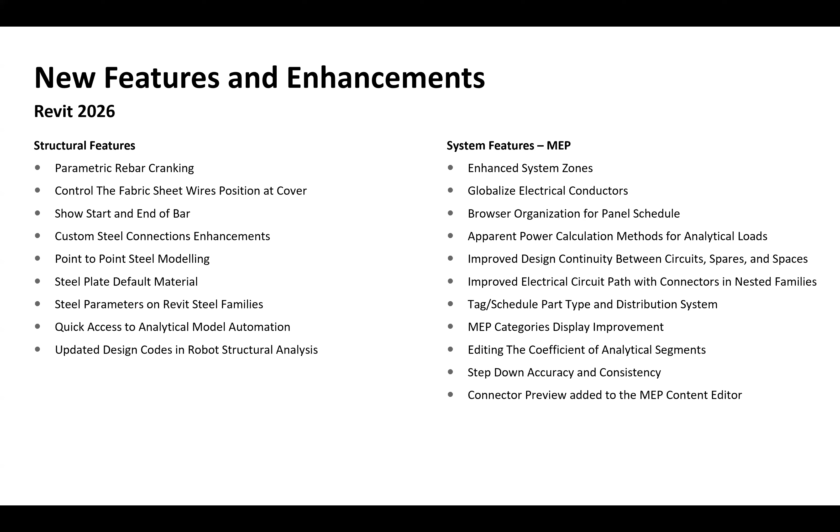Let's talk about the core highlight features from the list we have seen before. The major one is ReCap in Revit 2026. In Revit 2026, you will see the introduction of this ReCap plugin, which introduces powerful scan-to-mesh capabilities. This will enable you to convert point clouds into segmented mesh models using local processing. So the plugin offers local processing.

When you process that model, it can be opened in the ReCap mesh editor, which allows you to select the mesh surfaces within your mesh model. Then you can classify them into sets of groups and layers, and you can clean the mesh before exporting to different software or different formats.

There are plenty of formats supported by the plugin, which includes NWC, which comes from Navisworks. If you are using any other software, you can export to OBJ. In addition, there is another format for Revit specifically, and you can export to that format and then link your mesh with Revit.

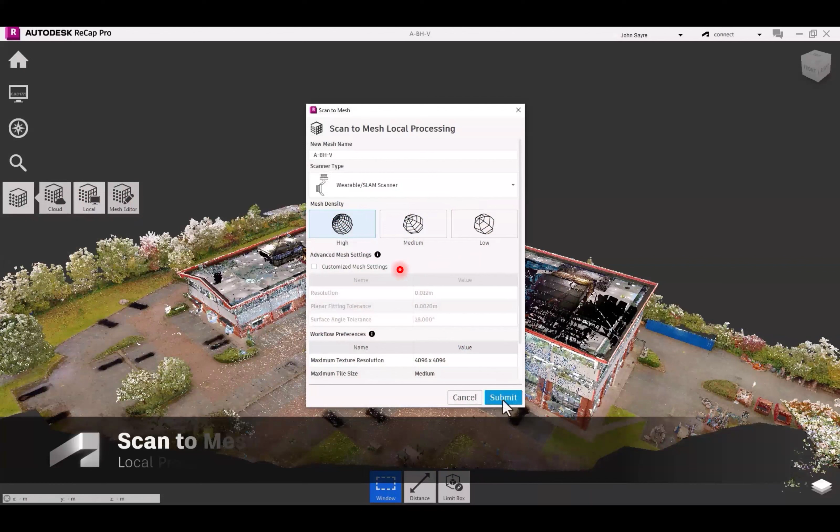So if you are exporting an NWC file, it is automatically clash detectable in ACC. Okay, which is again a very good feature. So I got a little bit of video over here where you will see we got the local processing, and we got some options over here where you can select the mesh density as well.

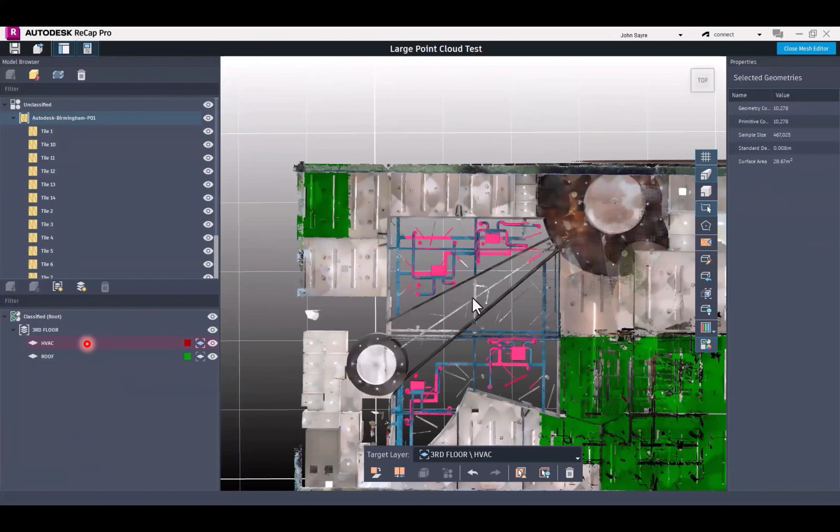And once you select it, you can open the model in the mesh editor. So these are simply the classifications there. You can classify just like it's selecting here, and you can add it to the classifications. And again, it's easier when you export it to Revit. You can easily classify these as the families. So it's better you do all of those things in Recap Pro before exporting it to any other software, be it Navisworks or Revit.

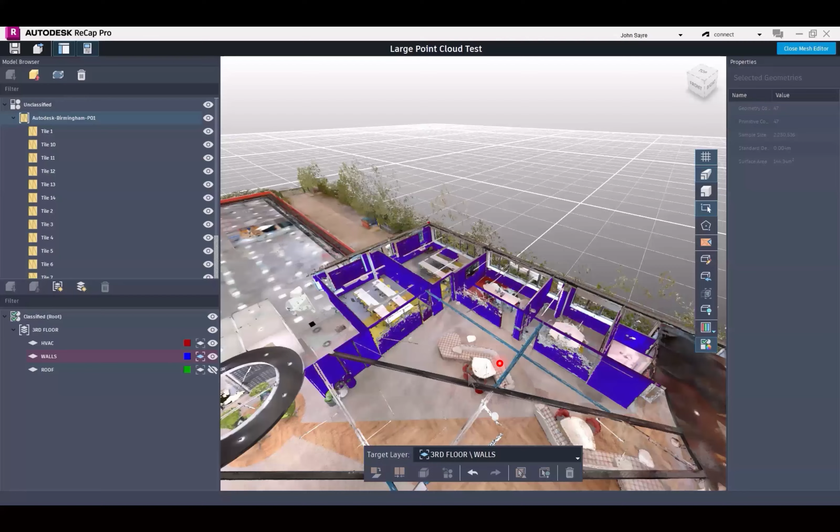So that's the new one, which you will see if you open your Revit now after installing Recap Pro 2026. So you can link Recap mesh models, and you can see it's already linked. Now it's adding to the document like that. And you can select objects, promote to the family, see the family name, use the existing family template or whatever you want to use. Yeah, so that's okay. Let's go next.

Again, so we already discussed, within the Revit Family Editor, after exporting your mesh to Revit, you can fine tune objects simply by adding connectors or connection points and define extrusions for those mesh model lines. And you can do the parameters as well.

So Recap files also work seamlessly with your Autodesk Construction Cloud, like they are automatically flagged as clashable in ACC. So you can run detailed clash analysis between your point cloud and design models. So you don't need to muck around, and you can easily do that clash detection with your point cloud. So meshes created in the process don't yet support the real world texture, but no worries. It's already on the roadmap of Autodesk. So maybe in the near future, you will see those updates as well.

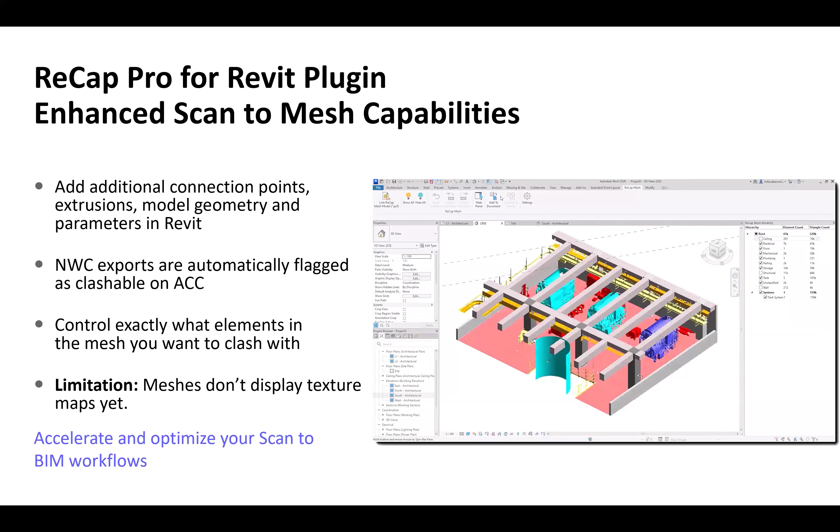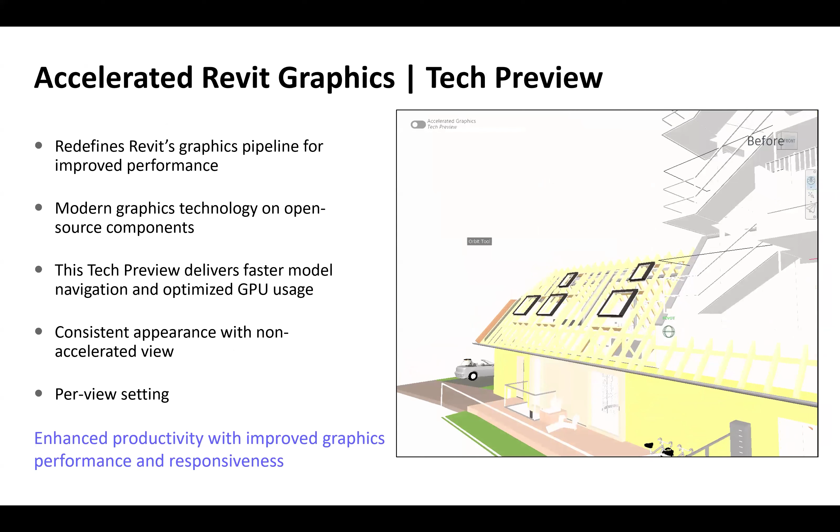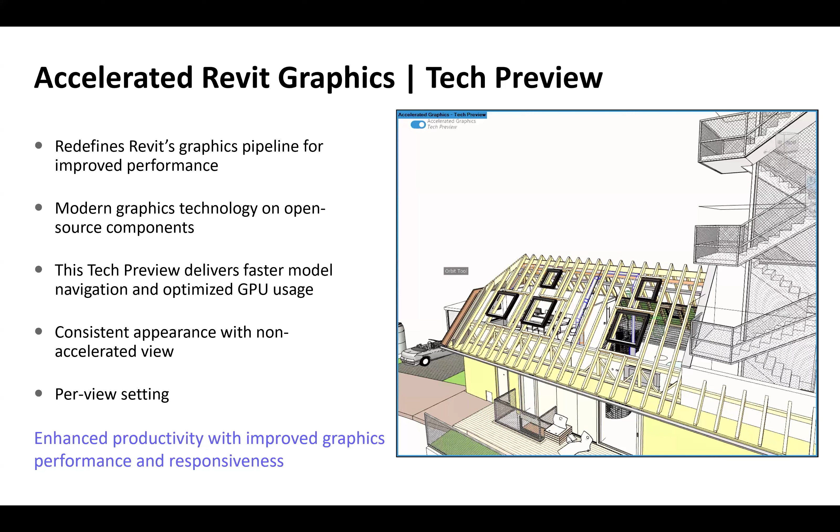Okay. So in Revit 2026, we got the introduction of this accelerated graphics tech preview, simply overhauling the graphics pipeline for improved performance and hardware utilization. So this feature will allow users to simply toggle on the accelerated mode quickly, and you can see some modern graphics, and you can speedily navigate around your model and make your design reviews even faster.

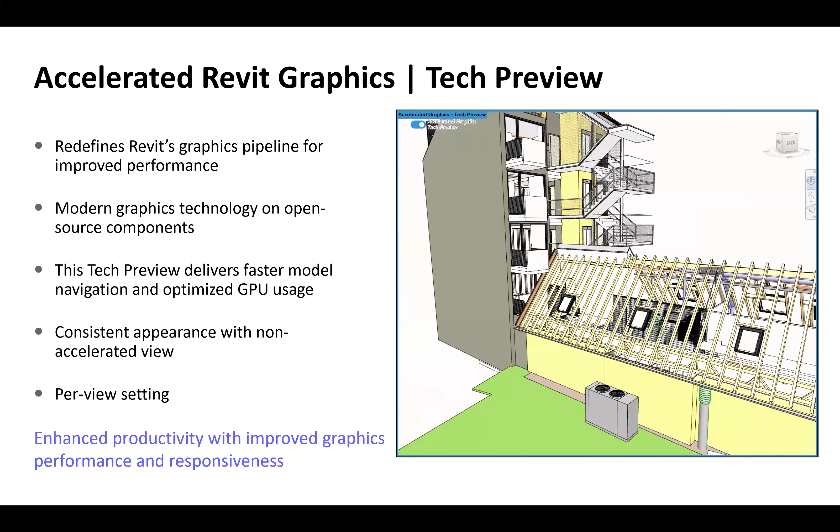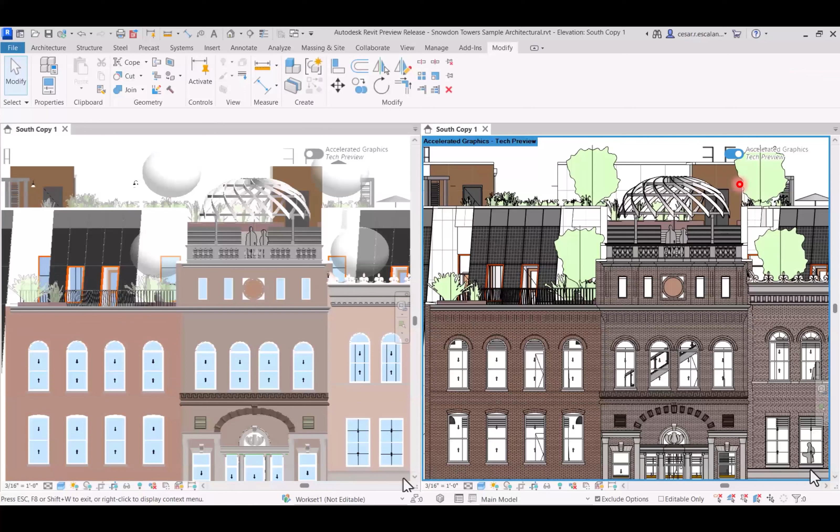So, yep. And again, I got a little bit of video about this, how you can quickly toggle on and all that stuff. You can right click on your screen, you got the option there, and you got this option here, which you can quickly toggle on. And you can see this is without accelerated graphics, and this is with accelerated graphics, which are a lot different from each other. So you can notice the difference in the details with accelerated graphics.

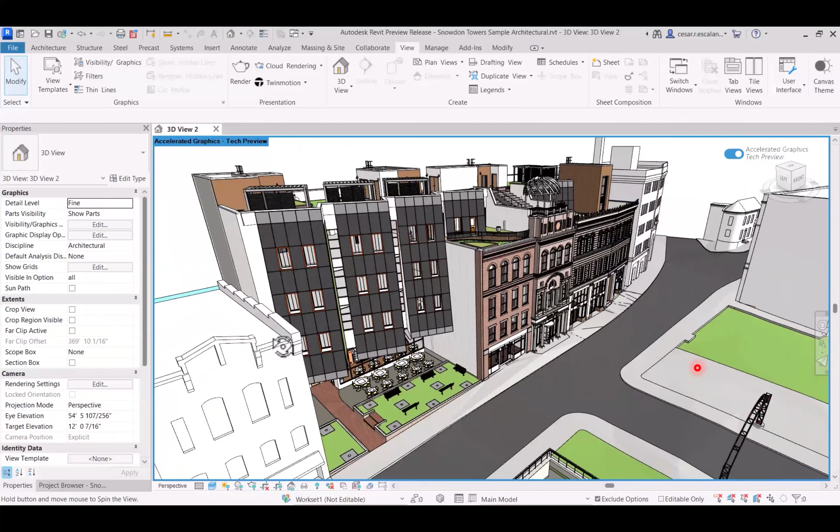Okay, so we have some limitations with accelerated Revit graphics. It supports most geometry, including Revit links, but keep in mind it doesn't support coordination models and point clouds for now. And also the realistic views still show as shaded, and the drafting patterns or your annotation stuff, you will see they are not accelerated, which means the views which are heavily annotated might still lag a little bit. Also, views like your sheets, legends, and drafting views don't fully support this new pipeline.

Also, there are some minimum recommendations as well, and make sure you meet those hardware requirements. You must have at least 4 GB of GPU or minimum 16 GB of RAM. So if memory runs low, Revit overall performance could become slow, and your graphics acceleration won't fix that. So make sure before using that, you at least meet these minimum standards.

Okay, now the coordination model enhancement. So if you use coordination models in Revit, you can now use visibility graphics to override their appearance and colors easily. So you can load multiple models like that and change their colors so that you can quickly determine where they are coming from.

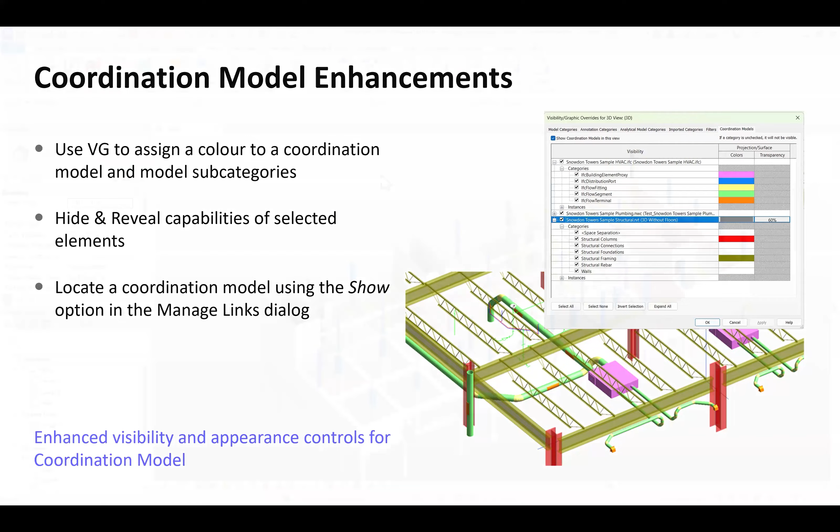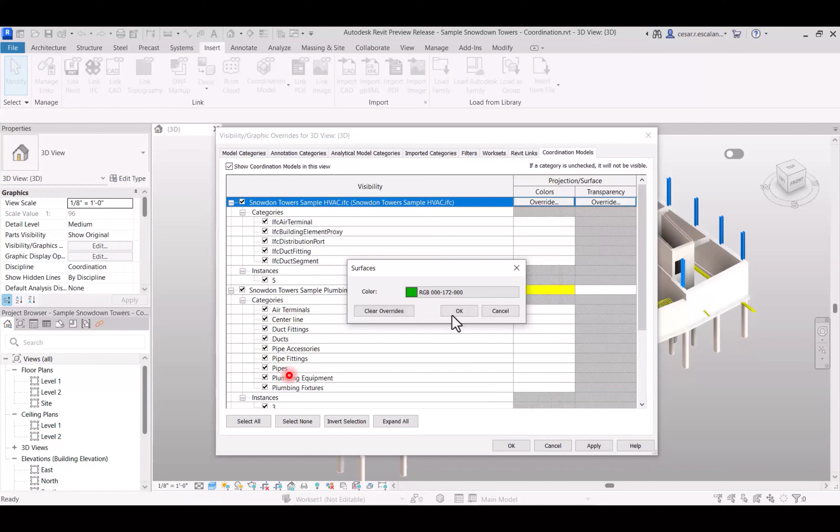Again, we got a little bit of video here. You already have this idea. It's simply adding unique colors to your loaded coordination model. So you can simply define, and you can even access their subcategories as well like that. So it's pretty straightforward for everyone. And you can now hide and use these visibility graphics.

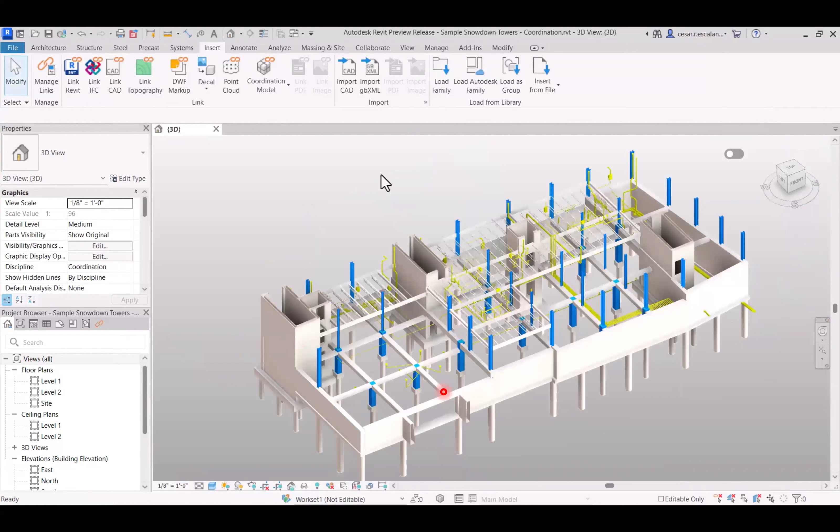Okay. So let's now talk about the features which are for users, for day-to-day users, not specific to any discipline. So you will see in this the sheet positioning and updates on the other stuff as well. So previously we had the guide grid for placing the sheets correctly, or aligning them by using the guide grid.

Now there's an option in Revit where you can just use your existing sheet or refer to an existing sheet and save your existing sheet location or position. And for the rest of the views, you can simply reuse that saved position. So I got a little bit of video here, which is pretty easy. You can see the new ribbon is actually added here. Let me play that.

Okay, so you can see the new ribbon is added here. You are in this view, and you can simply save the position, write down the name, and you can simply select the views. And in views, you got the saved position parameter as an instance parameter. So you can always select which saved position all of your views should follow. And if you change or update your default view, or you change the position, it will affect all the views which have the same position parameter defined for them.

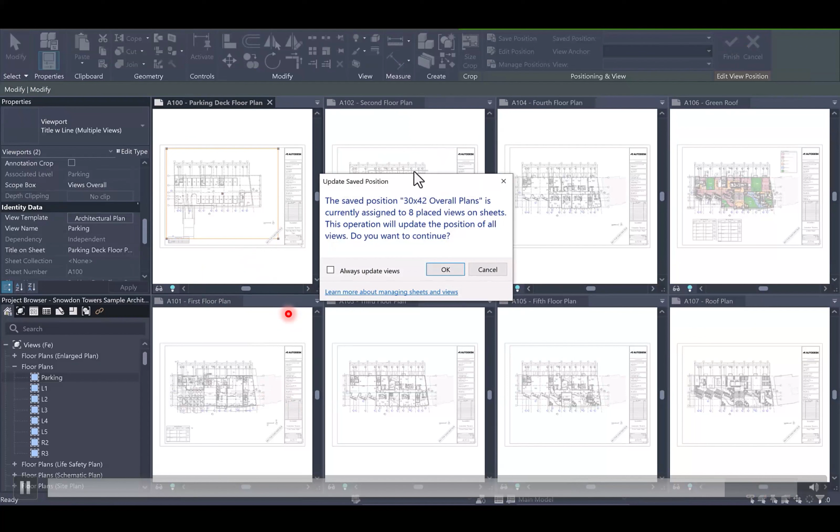Okay, so that's what this video is showing you. Yeah, you'll notice that all of these will move to the top left corner. Okay, so that's a pretty quick way to adjust your placement of the sheets rather than doing it with the guide grid. You can still use the guide grid as well.

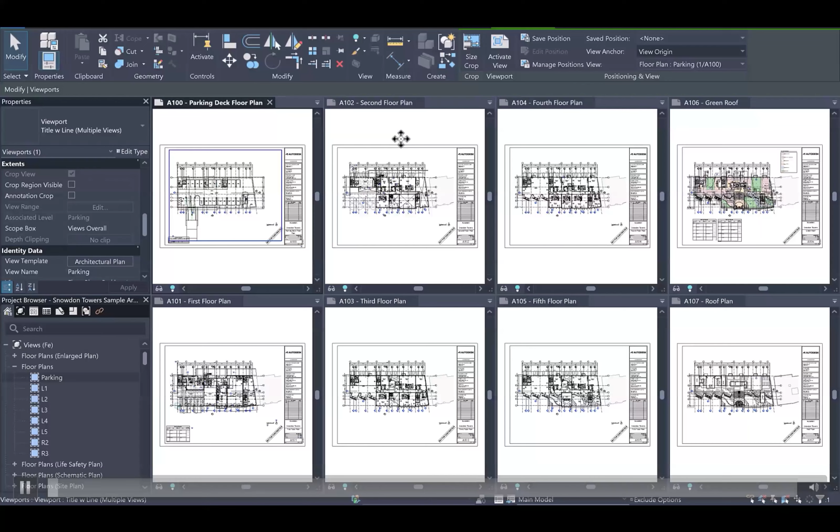Okay, so we got a few more sheet collection custom parameters and schedules. So in 2025, if you remember, they introduced the sheet collection. A sheet collection is simply the container that groups sheets together for organizational and management purposes. And this enhancement simply allows you to add custom parameters directly to the sheet collection. So now we have the category of sheet collection for adding project parameters. So you can add project parameters and you can even add shared parameters for the sheet collection category.

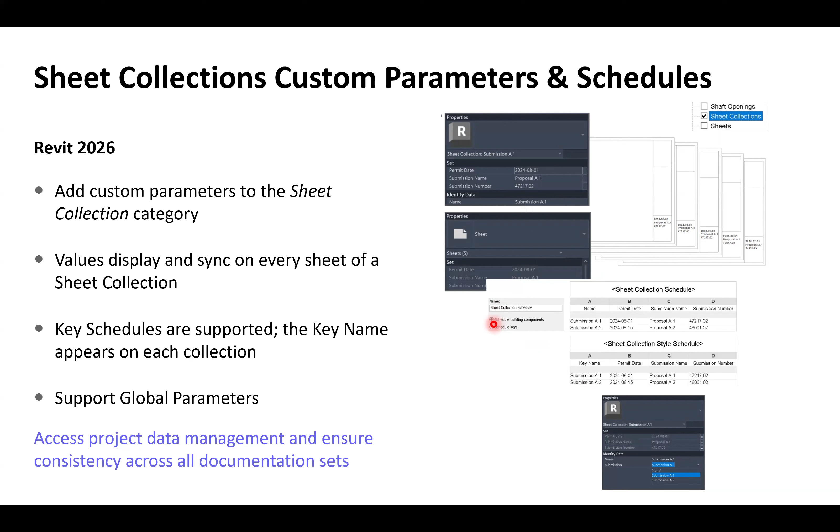And this way you can easily control the organization of your project browser, and it gives you more flexibility to control that. And these parameters also come up in the schedules, and they are also supported in key schedules. So all parameters that are added to the sheet collection category also support the association of global parameters. So it's giving you more control over your drawing. So you can add global parameters and quickly adjust all your sheet collections or the sheets which are in the collections as well. Let's go next.

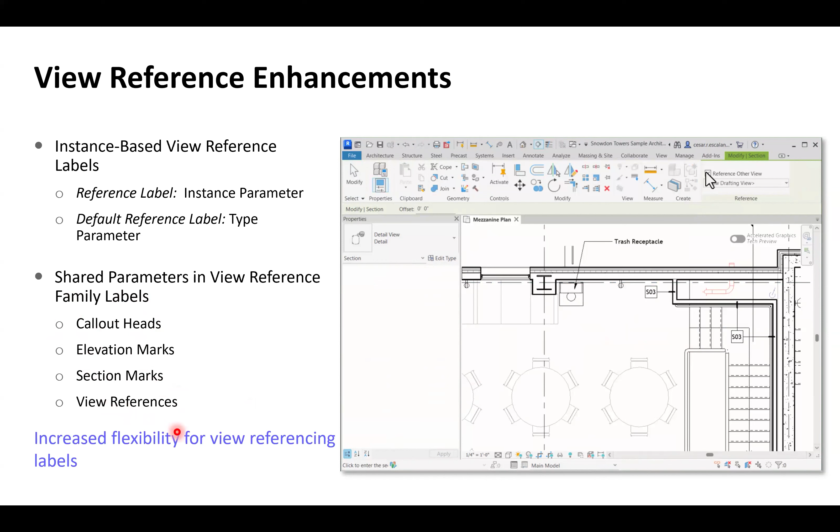Next, let's go next. And this is about view reference enhancement. We got some view reference enhancement where you can refer to any other view. And again, they have added instance parameter, where you can quickly make changes, give you more flexibility to use your view reference, and these are applicable to all your callout heads, elevation marker, section markers, and the view references as well.

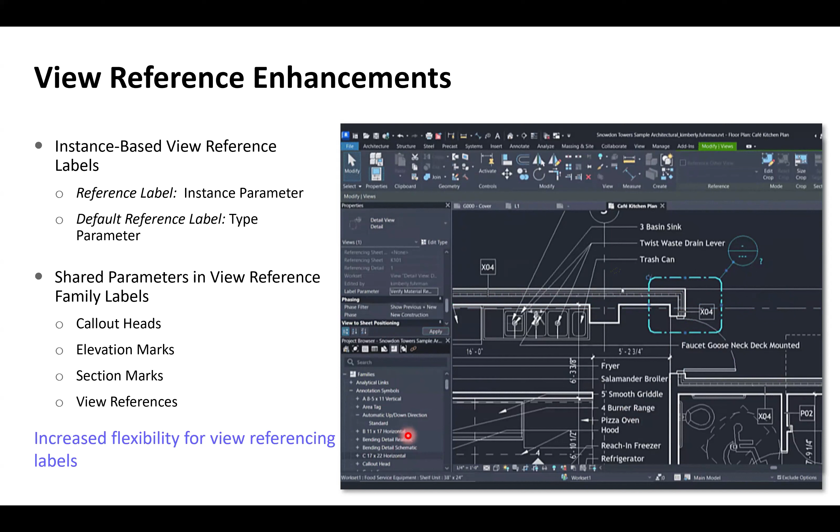Yep, you can see that here. That's the family workflow, how you can add a parameter. It can be the shared parameter or the instance or the type parameter. So yeah, and you can see those parameters here and the instance label on your properties palette as well. So in short, it gives you more flexibility for your view reference. You can easily add labels and control the informations as well.

Okay, let's just go next. And this is also a good update. Like if you are using the CAD in your project, the manage links dialog box will simply show you all imported 2D and linked CAD files, and you no longer need to manually hunt for the imported CAD files in the project, as you can easily use these remove and show options directly from manage links. You just need to right click on it and you can access the show option and the remove option as well. So it becomes very quick. You can quickly find your CAD file location easily.

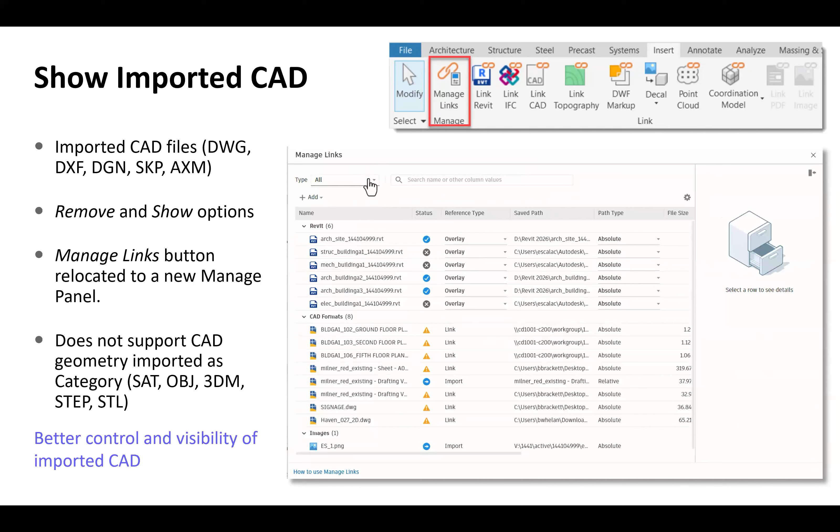Okay. We got some IFC enhancement as well. So you will see they are linking faster, 50% faster, and you will see we have introduced some new features for the positioning. So you will see some new positioning. This feature simply enhances your coordination with external consultants, as they usually use the IFC file. So you can now do more accurate positioning and orientation of your link models pretty quickly instead of doing the manual adjustment. Okay.

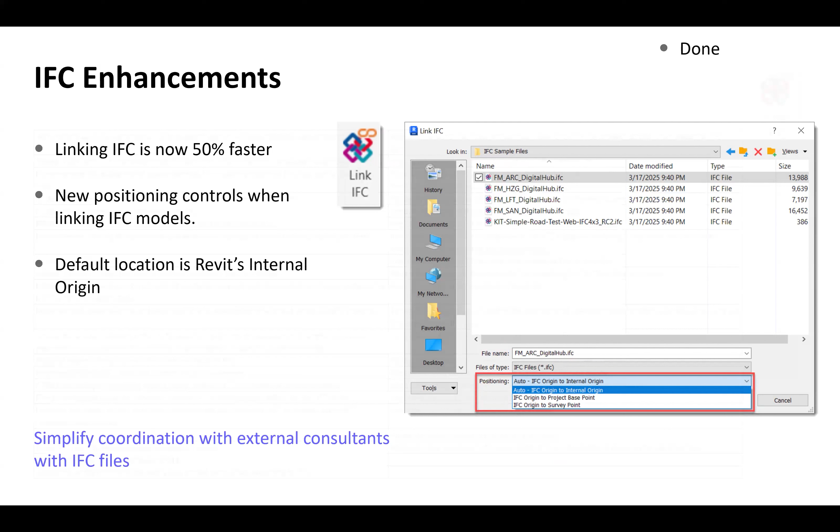Again, few more updates, more than 40 IFC enhancements. You can always check them. All those lists are available. So again, a lot of enhancement on the IFC end.

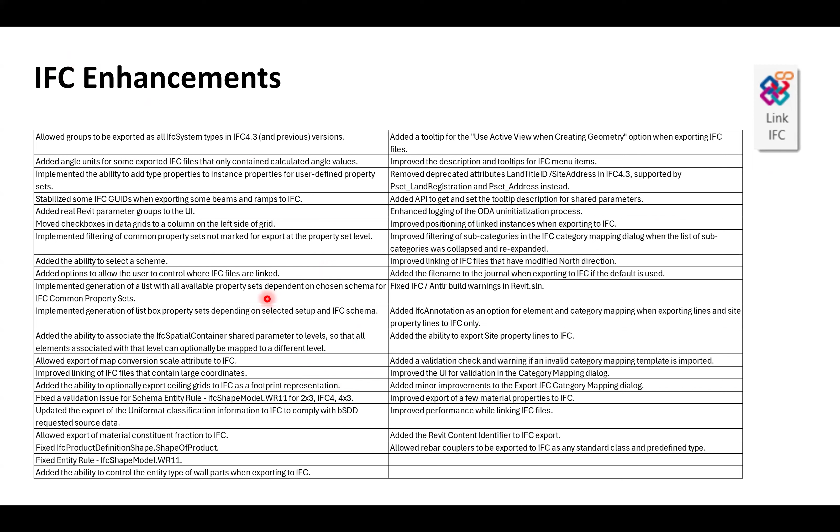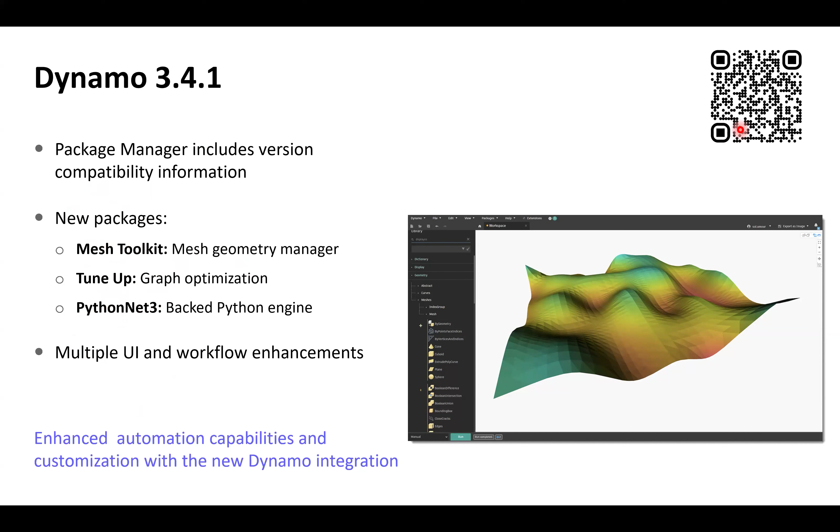Okay, let's go next. And there are some relocations of the bars, and you will see all of this stuff. This is about the array. So we previously got this sequence, and you will see some new control locations. So you will get experience with it when you start using the 2026 versions. Some of the items they have moved from the options bar to the ribbon, and yeah, you will simply experience that.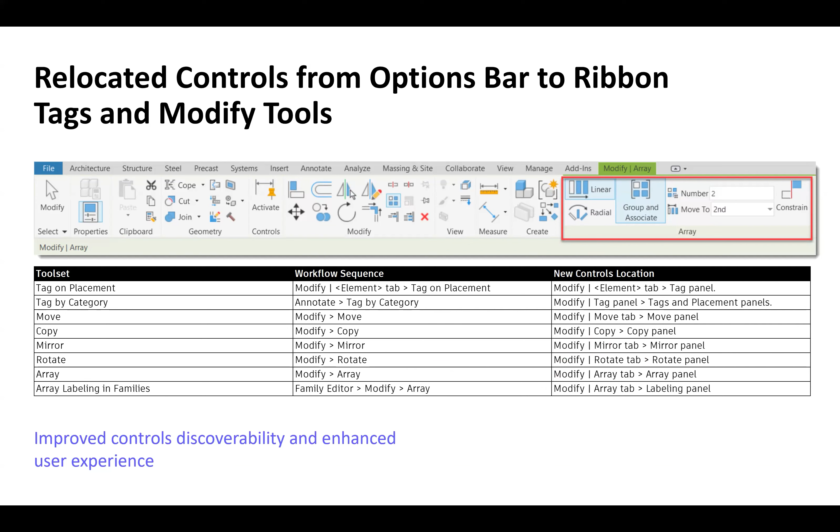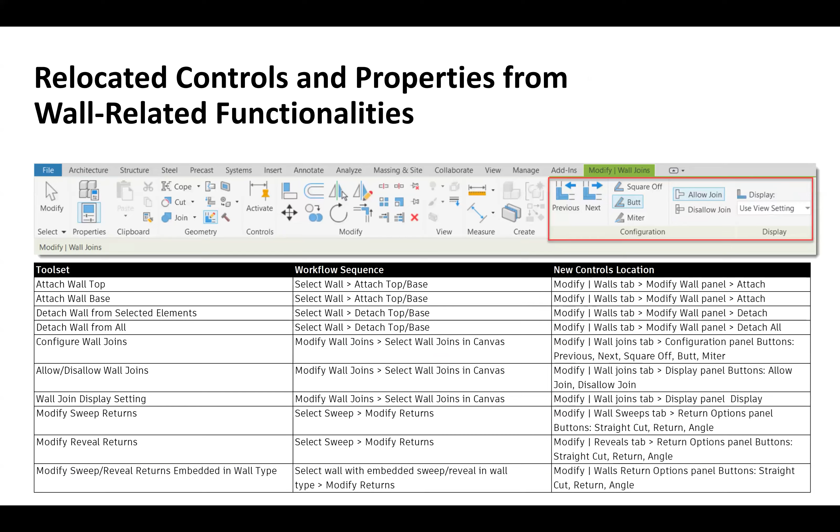Same goes for here. Some wall related functionalities are also moved to the ribbon here, and this shows the complete list of the new control locations. And again, you can always check them. Same goes with the other things, like you will see the dimensions are also relocated to a different location. Let me just go next.

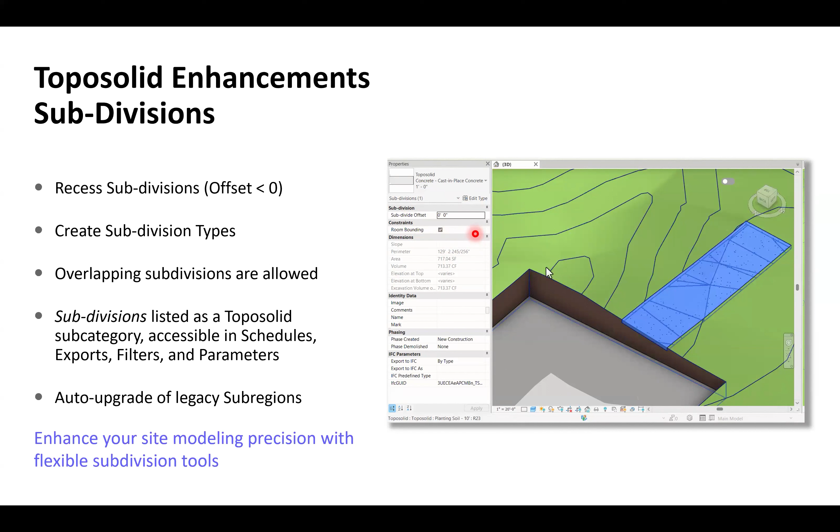Okay, now let's talk about the specific changes to the disciplines. So we will see the architecture changes, and again, most of them are related to the toposolid and the wall changes. So you can see now we can set our subdivisions to negative values as well. So it basically allows you to create recess elements, like you can create sunken roads, or any landscape beds, and it also supports a positive value, and you can change the material or change the type of those subdivisions from the type selector as well. Okay, let's go next.

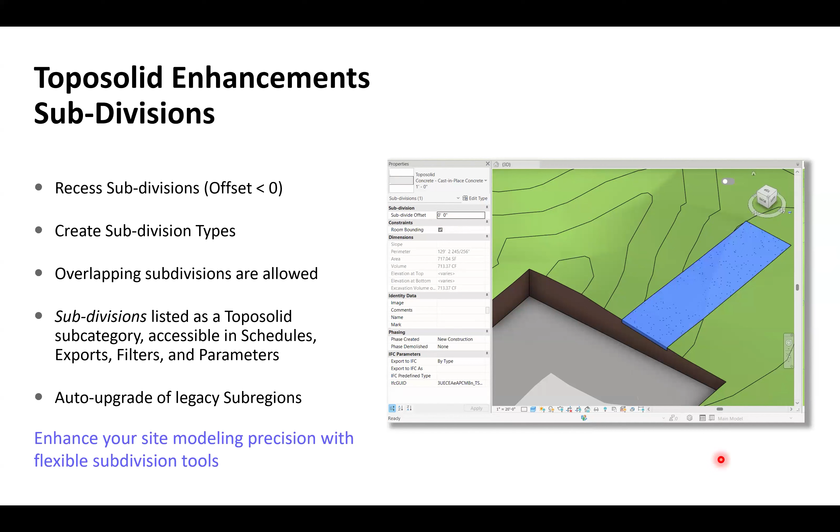Okay, you will also see some toposolid enhancements to improve accuracy with linked topography, and this is essentially for Civil 3D. Like you can easily link your toposolids from Civil 3D, and they have also revised the algorithm for the volume calculation. So the new algorithm, if you read in detail, simply employs a boundary constraint method, and it gives you more accurate volume calculations. So you can check that. And again, this is also consistent with the previous version. So if you just load your topo surface to the toposolids, you will find that it is very consistent with your previous versions as well.

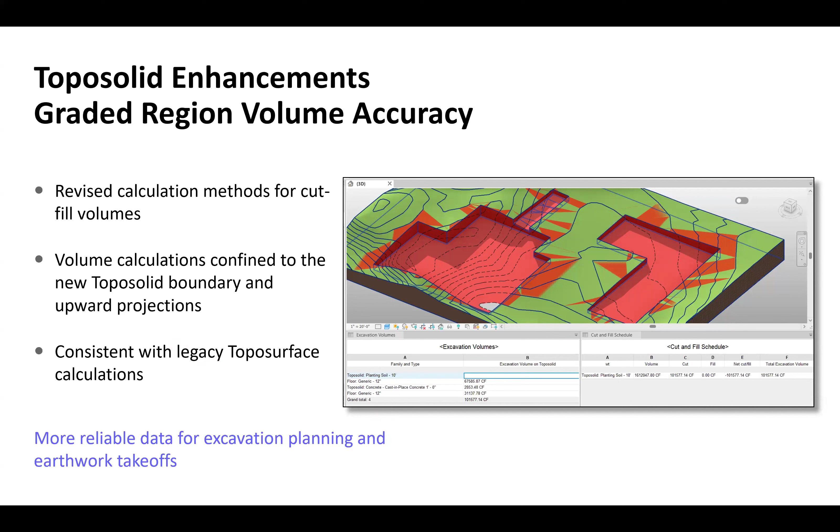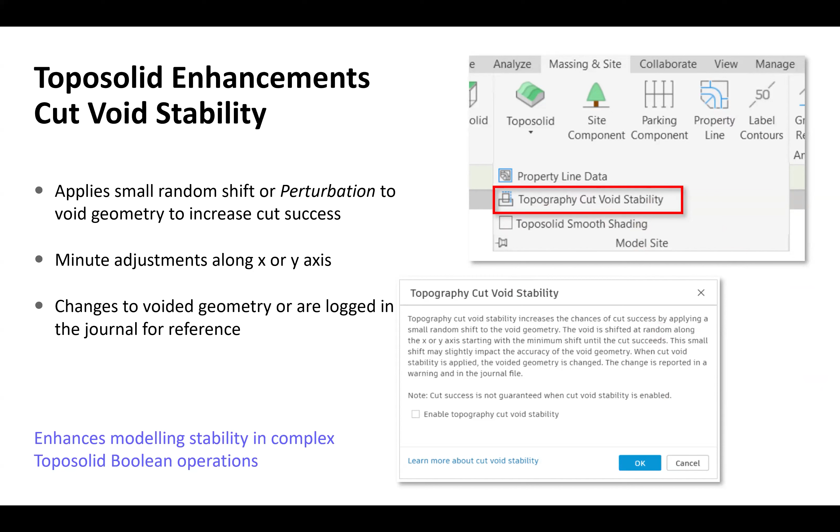Again, the next update is also about toposolids or the topography. So previously, you would have noticed some incompatibility when you were cutting the void. So now the cut void stability option is added to the Toposolid extended panel. And if you toggle this on, it ensures that the void cuts successfully by slightly shifting the geometry along the X and Y axes. Like the void will automatically adjust itself slightly to ensure that it cuts properly. So when you are working on complex toposolid geometry, make sure you enable this one before cutting the void. Okay, let's move to the next.

And again, this one is pretty good. Now you can simply copy and paste these slab shape points. You can easily copy them and paste them. So that's a good one as well. You can also adjust the number of points that your toposolid can contain through the configuration files. You can check on the Autodesk website how you can access those configuration files and change the adjustable threshold points for your toposolids.

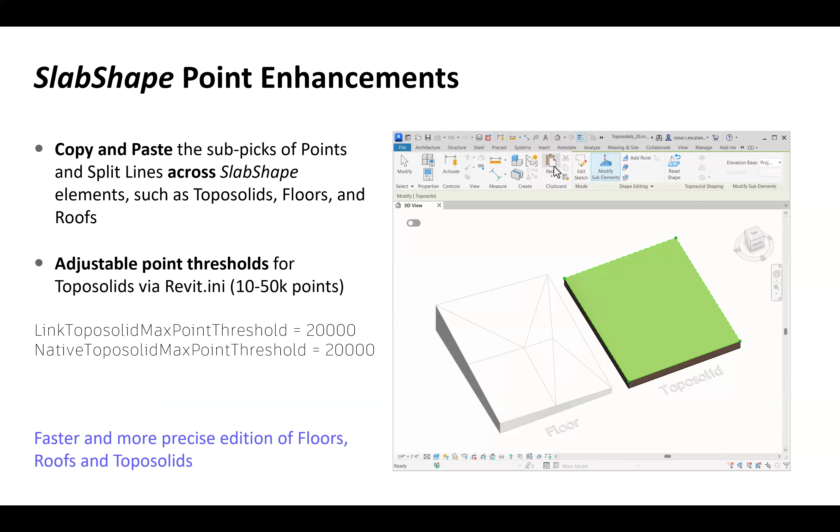So finally, you have seen all these toposolid enhancements where you can do recessed subdivisions, like it accepts minus values, enhanced compatibility with Civil 3D, and you can bring your toposolids from ACC Docs as well. And you have seen the cut void stability and other features as well. So it's heavily around the toposolid stuff.

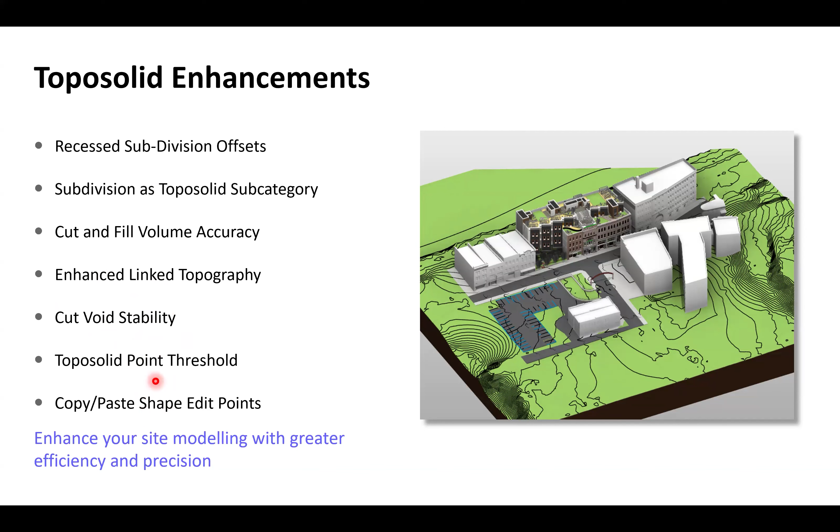Okay, so here is a quick video over here. Just cutting the subdivisions, and you'll see some negative offset over here. And you can see we can create a sunken slab like that or a landscape bed like that. Again, the multiple subdivisions.

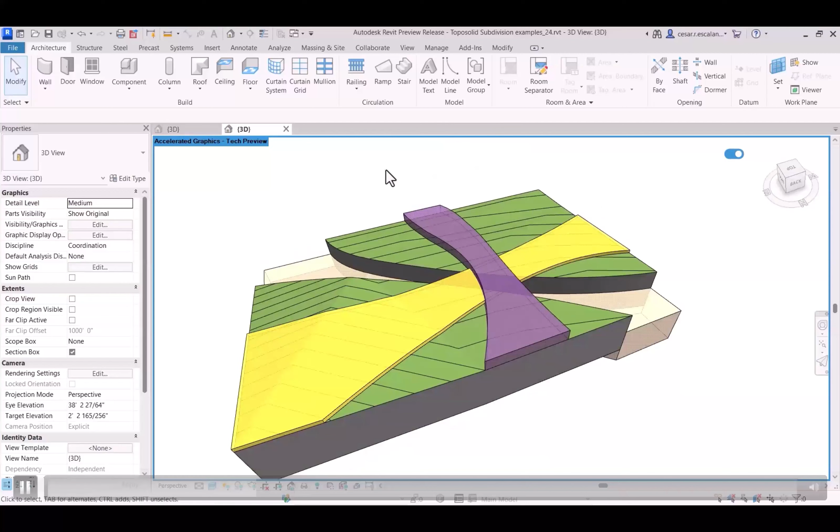I'll try to move it a bit faster.

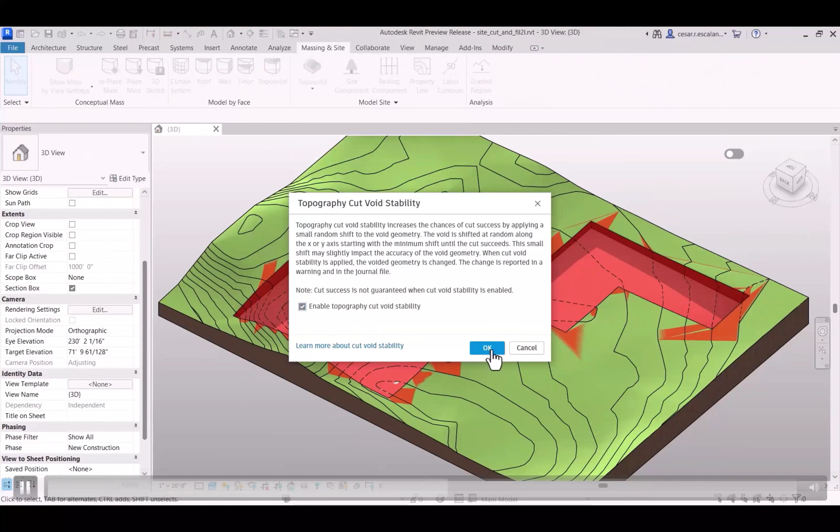In your cut void stability, which you can access from your TopoSolid extended panel, you can enable them for improved void cutting within your TopoSolid.

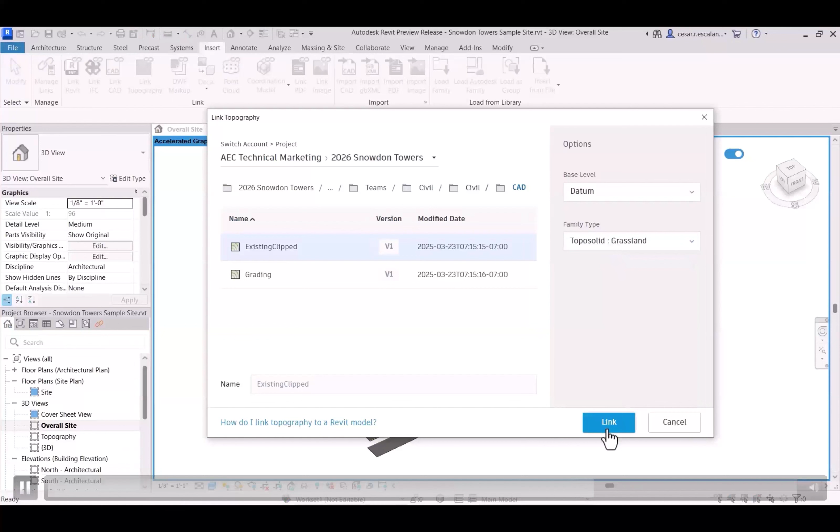That's how when you are linking your topography or the TopoSolid from Civil 3D or from ACC, it can be the CAD or Civil 3D as well. This is the same as copying the shape modifier points. You can simply use Control C and Control V, which is very quick, to transfer your toposolid elevation points easily.

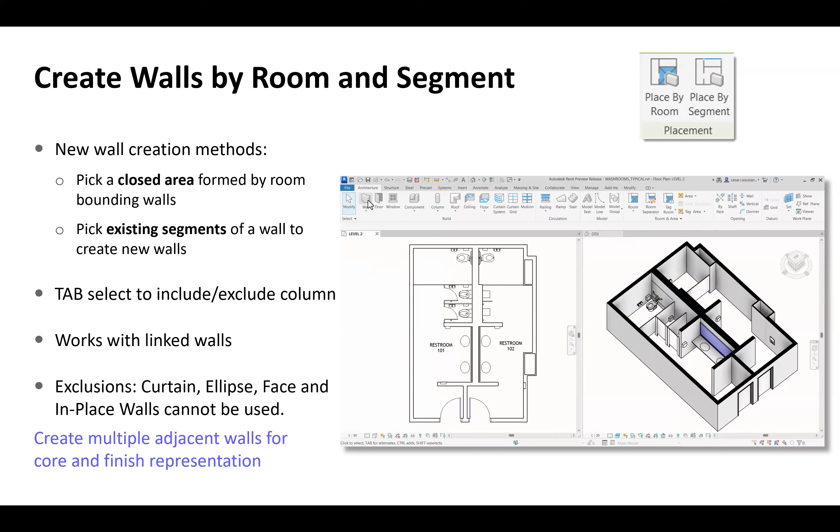Now the updates are about walls. The major updates are on the walls. You can now create walls by room and segment. You can simply place the wall by room. If you have defined the rooms, you can place them by rooms or by segment, like selecting the side of the wall, picking, and simply placing the walls.

This is also a good one you won't have seen previously: allow compound structure without core layer. Now you can move all your layers outside the core structure. This feature gives you the way to work with compound structure and more flexibility, and ensures your walls join properly. You can relocate all of your layers to the interior or exterior side as well, giving more flexibility to play with these layers.

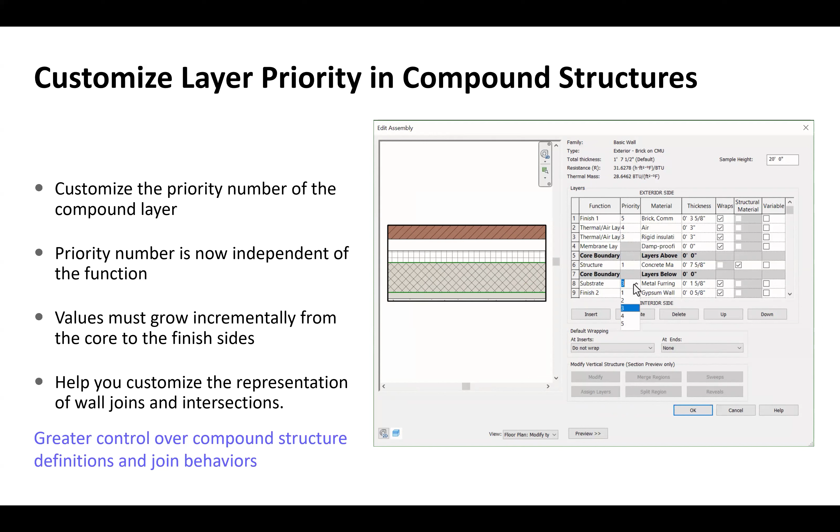Now they have added a new column where you can select the priority for your walls. The priority numbers in these compound structures range from 1 to 5, and they determine which layers connect when the walls intersect. 1 is the highest priority and 5 is the lowest priority.

Let's go next, some updates for the analysis and insights. Insight is now included with your Revit installation, and it offers powerful tools for energy use and carbon analysis and all those stuff. Some updates related to GBXML as well.

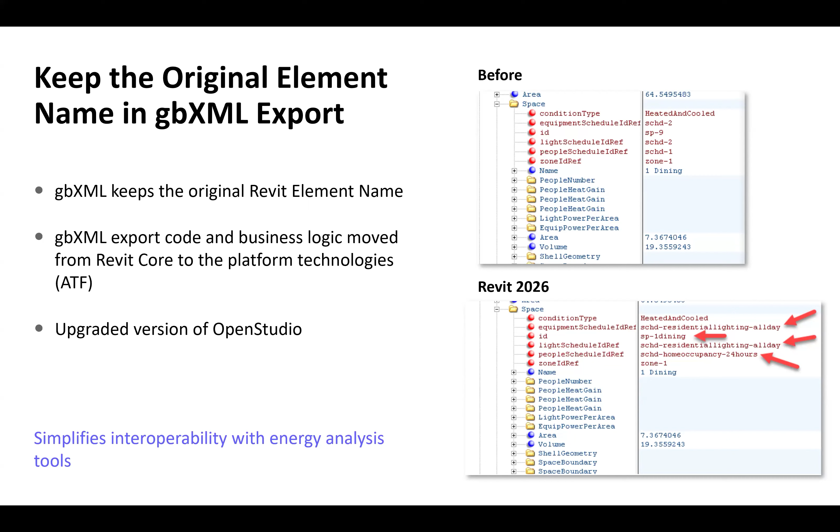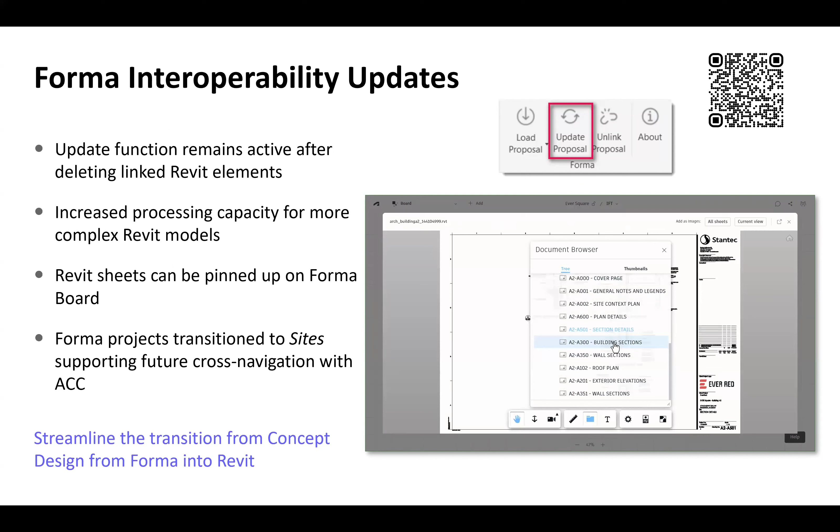Next, Twinmotion - you will see the enhanced family substitution. In 2026, they improved the Twinmotion workflow, especially when using family substitution, so now all Revit categories support the substitution. This gives you more flexibility to swap in high quality assets from Twinmotion. Just give it a check and see how those substitution settings work.

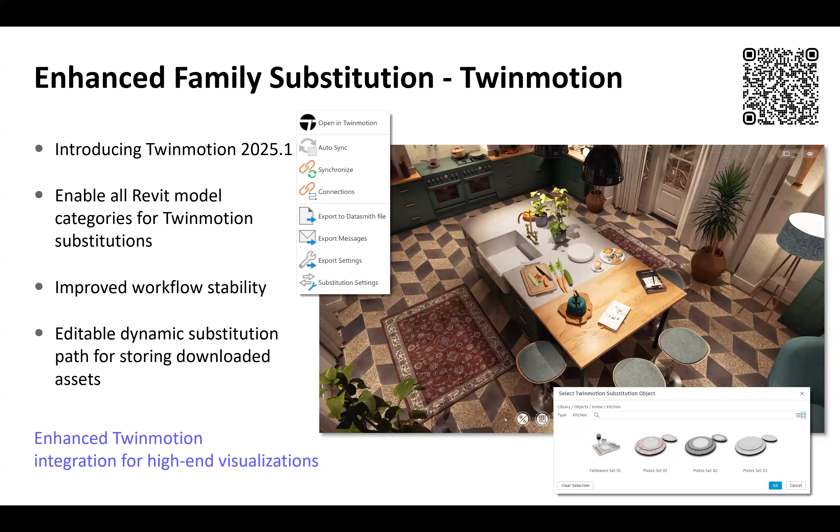Now let's jump on the structural stuff. I'm talking about a new feature, parametric rebar cranking. Until now, adding crank bends in Revit usually meant workarounds or manual tweaking just to bend your rebar. Now we got this parametric rebar cranking. I got a small video to show the workflow, let's go next and you can see it here.

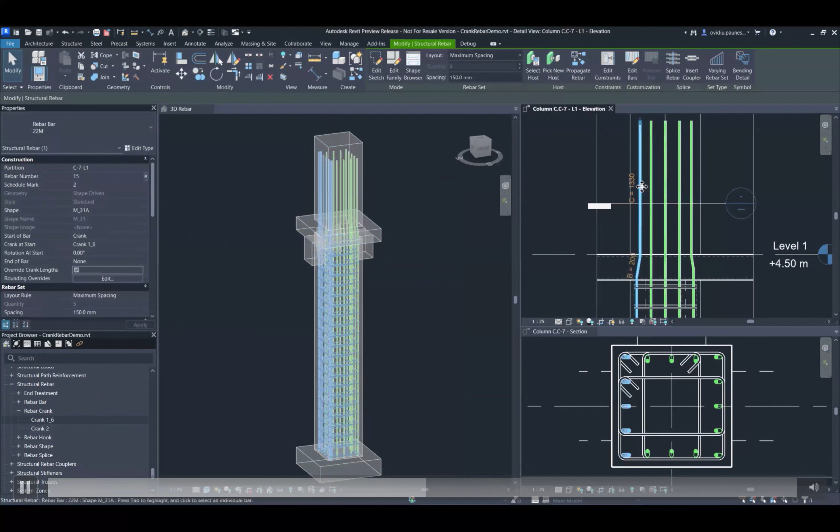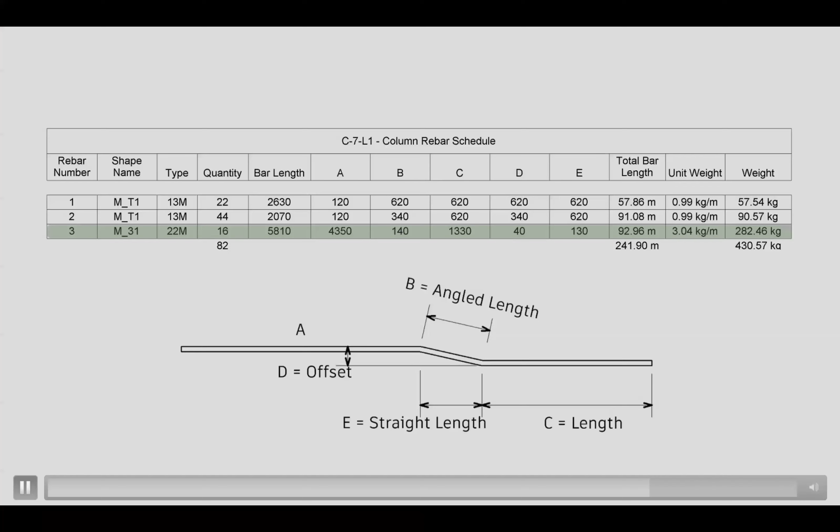You will see the relevant parameters for the cranking, and you can now define it here, override your crank lengths like that, and also capture them on the schedules as well. There's detailed information related to all those stuff on the Autodesk website about what these parameters mean. Check that and you'll learn more about the parameters related to crank lengths.

Going next, now we got more flexible control for the fabric sheet wire positions at the cover. You can precisely align fabric sheets and custom fabric sheets to match the concrete cover requirements, making sure you comply with your design specifications. This feature enhances productivity for rebar and precast detailing as well.

Detailing reinforcement just got a whole lot easier. You can now add hooks, cranks, and other end treatments to rebar ends with a better workflow. There's a new feature called show start and end bar orientation, which lets you see exactly how the bars are positioned both in 3D views and 2D views.

We got some custom steel connection enhancements. You can now move standalone elements, sketch plates, bolt patterns, and modify properties all within the edit mode. Just give it a check - you can now do custom steel connections faster with these new updates.

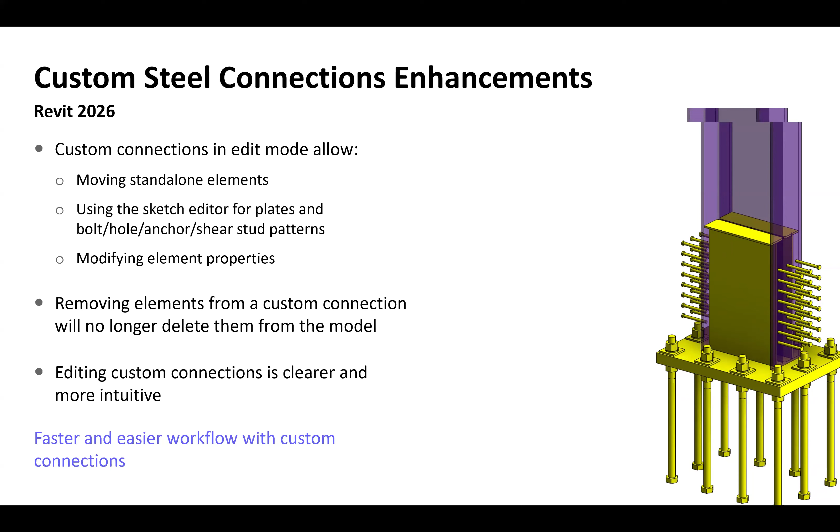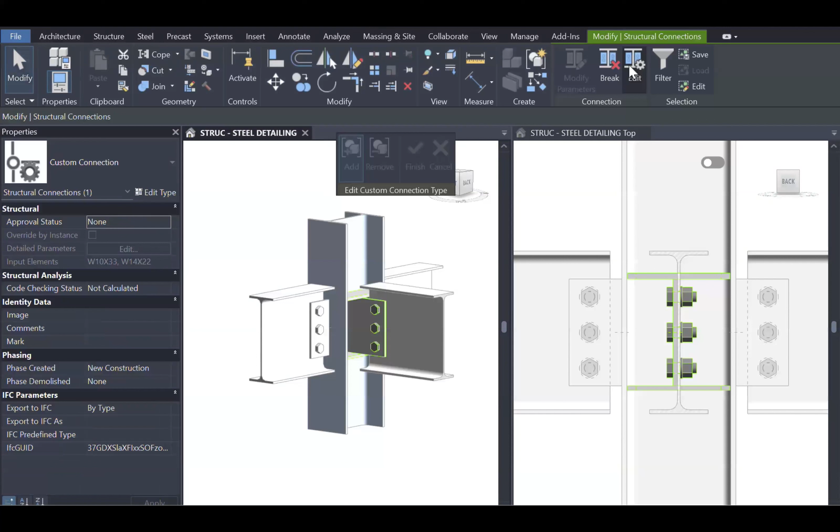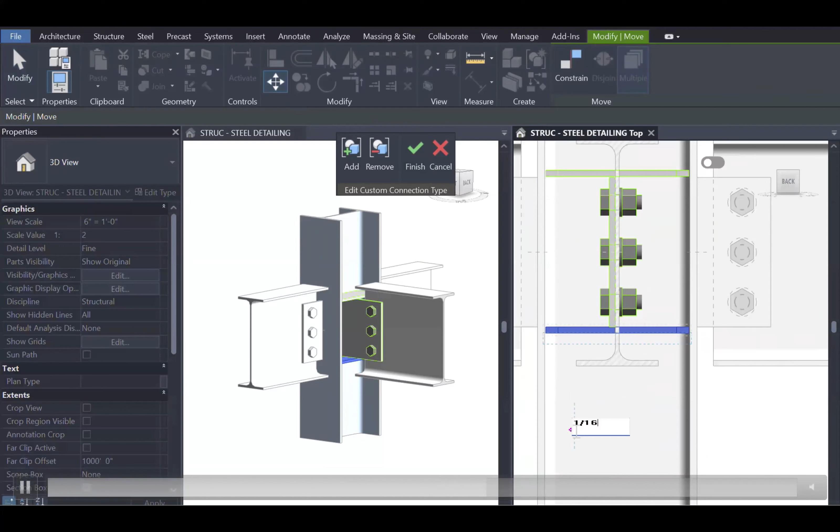I got a little video here for you to check. You can see we can now move standalone elements inside the custom connections, and that while being in the edit mode - so you don't need to come out of the edit mode to make the changes.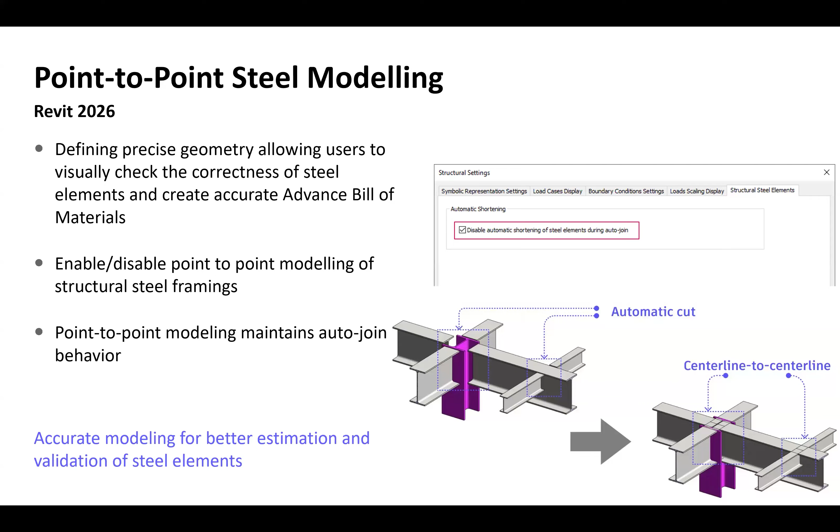If you need it, you can always switch back to the legacy Revit versions as well. You can simply untick them and switch back to previous versions. That's the same way you can turn on your new feature of auto join and all those stuff.

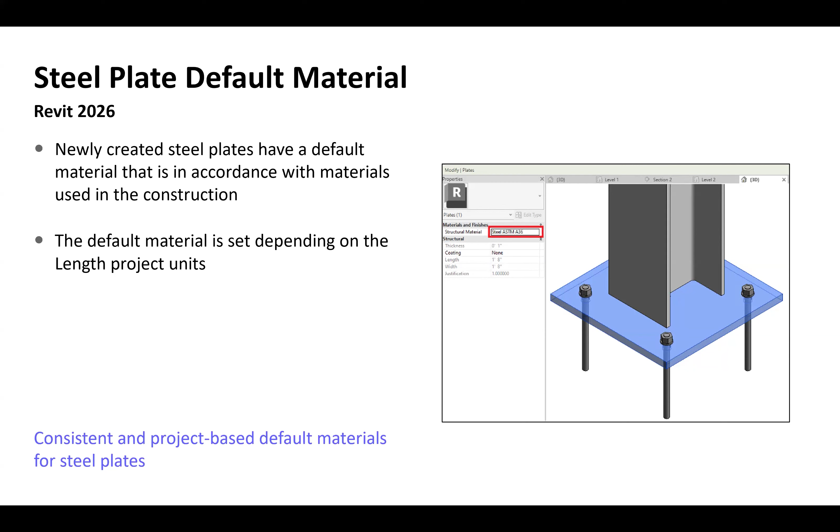Steel plate default material. Newly created steel plates now have default materials. If you are using imperial units, you will see default materials like the ASTMs, and for metric units you will see different standards. Make sure these are loaded in your projects.

We have some new parameters like paint area, and the exact weight parameters are now available for all structural steel elements created with shape-driven families. You will see these parameters in the 2026 version. Again, this simply enhances the way you design steel and adds more details to your steel design structure.

There are also some improvements in analytical modeling as well. This automation simply allows you to quickly access it and run from the ribbon based on your pre-selected sets of physical objects. There is still much more to come in this capability. So if you are using some analytical modeling automation, just go and give it a check and try to run and see how it works for you.

This is the end of the structure, and last we got the systems. Let's talk about what's new on the MEP side. On the MEP side, you will see some major updates on the HVAC zones and the system zones. They have been now combined together, which allows you to be more flexible while using the system zones.

You can now place your zones by sketch. You can simply draw a sketch, and you can define your zones by space as well. The previous version doesn't give you this flexibility; now you got this flexibility, and this simply reduces the confusion that was previously there when doing the zoning.

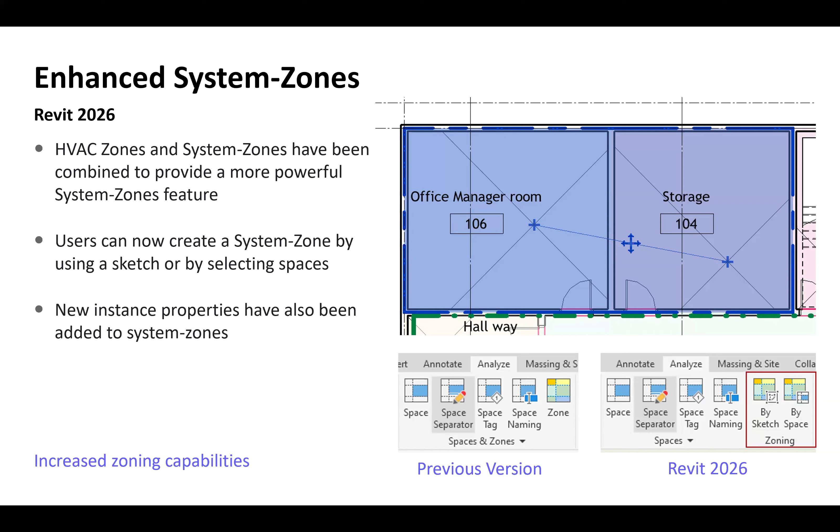Next is about the global electrical conductors. I'll say that's a good standout update. Revit now supports multi-core cables, a feature that electrical designers around the world would have been waiting for. In previous versions, Revit only supported the AWG, or American wire gauge, system, which automatically sizes the conductor for you based on the circuit load. That was good for US based projects, but for the rest of the world, not so much.

Now you can set and adjust the size of your conductor manually, giving you full control over how you design and document your electrical systems. You will also notice a change in terminology, like your wire type has been replaced with cable type and cable size, to better reflect how cables are specified in other parts of the world.

The old voltage drop field has been removed too, and in its place Revit now supports more detailed conductor properties. In short, these updates make Revit's electrical tools more flexible, more globally relevant, and more user friendly, especially for projects outside of the US.

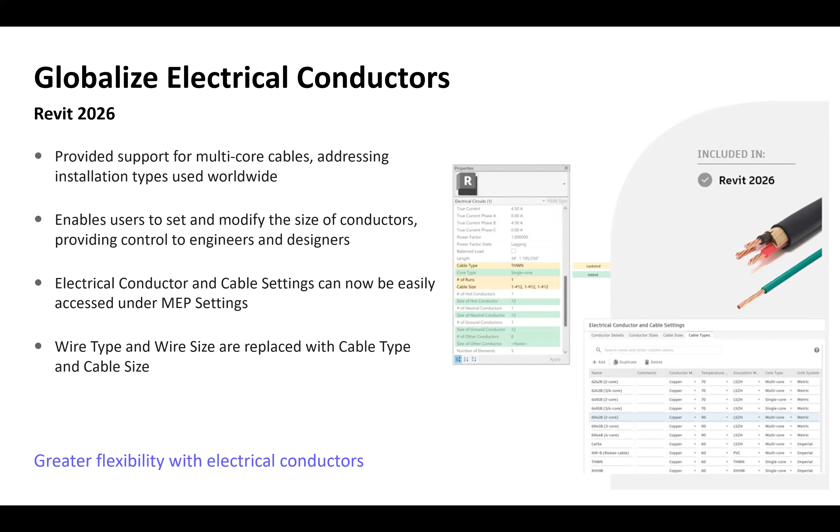Let's see what's next. This one is also on the electrical side. If you use panel schedules, there is now browser organization for panel schedules, same as the project browser organization, so you can organize your panel schedules. You have some new options like grouping and sorting, plus you can now use project parameters and shared parameters within panel schedules to customize the way you want to organize your data. The bottom line is MEP or electrical users have much more control and clarity when it comes to organizing electrical equipment and keeping panel schedules neat, accurate, and easy to work with.

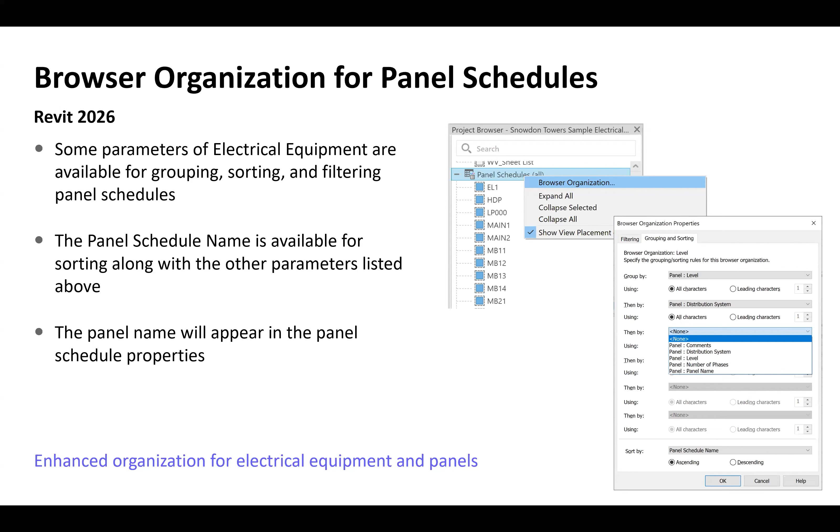So, let's go next. Again, we got some new updates on the calculation methods.

On the electrical side, in the 2026 version, it lets you choose how apparent power is calculated for analytical components. You can set it to assume a power factor of one, regardless of what's defined in your loads. This gives you more flexibility to do your own calculation, simplifying things especially in early design stages.

Okay, so improved design continuity between circuits, spares, and spaces. You can now apply shared parameters across circuits, spares, and spaces all at once, making your schedules more consistent.

For the circuit naming scheme, you can use project and shared parameters, including for spares and spaces. Now spares and spaces are also included in the circuit schedule. Empty circuits in your model are now converted to spares automatically - if you remove the last connection, your empty circuits will be converted directly to spares.

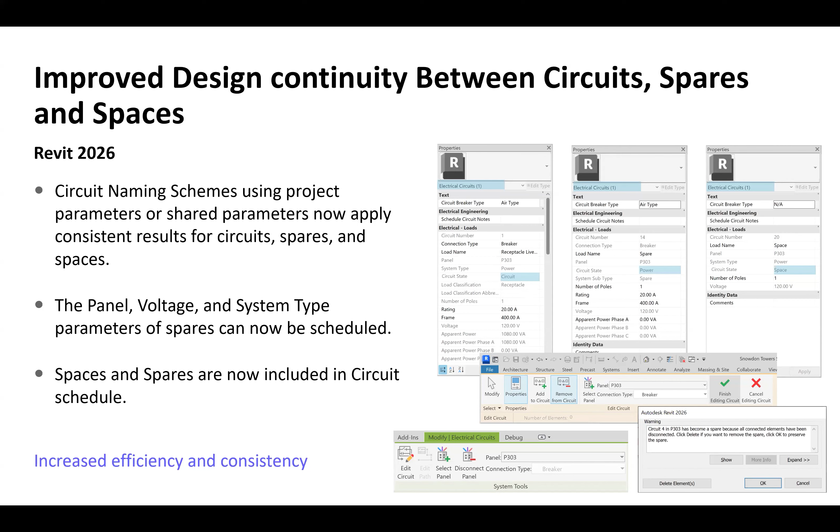Now your circuit path is able to recognize nested families. This means Revit can automatically find and connect to the correct location of nested electrical components, saving you time - you don't need to do any workarounds.

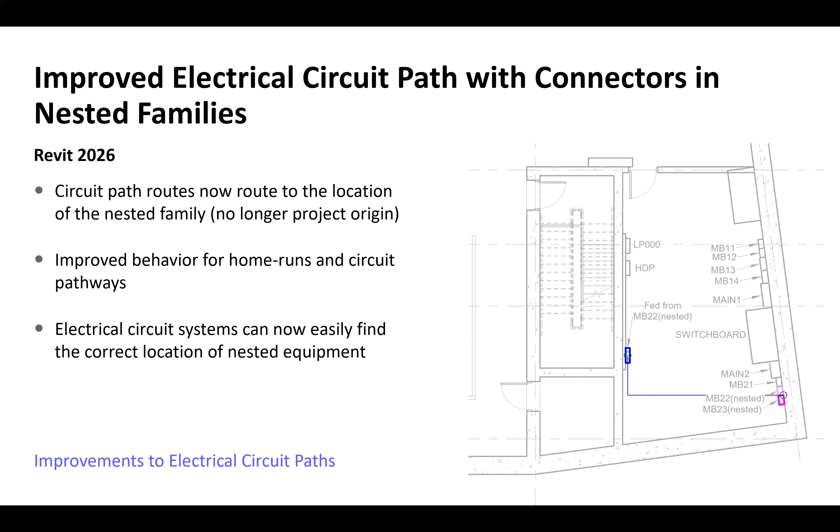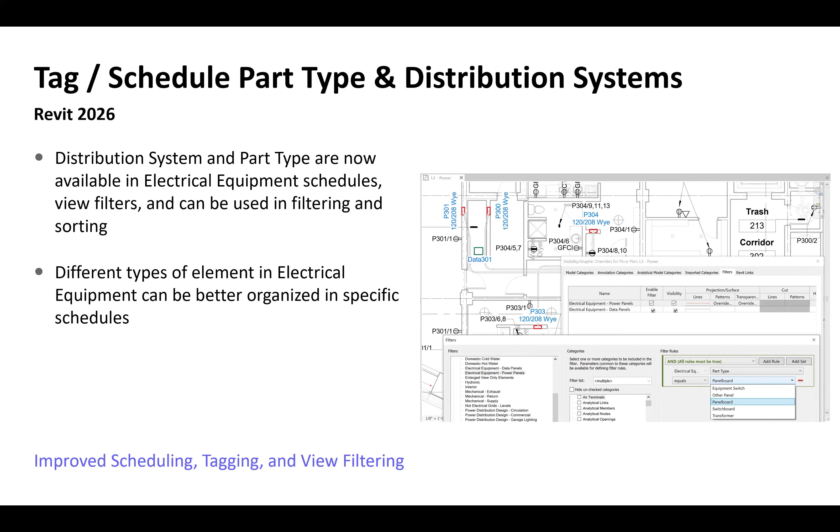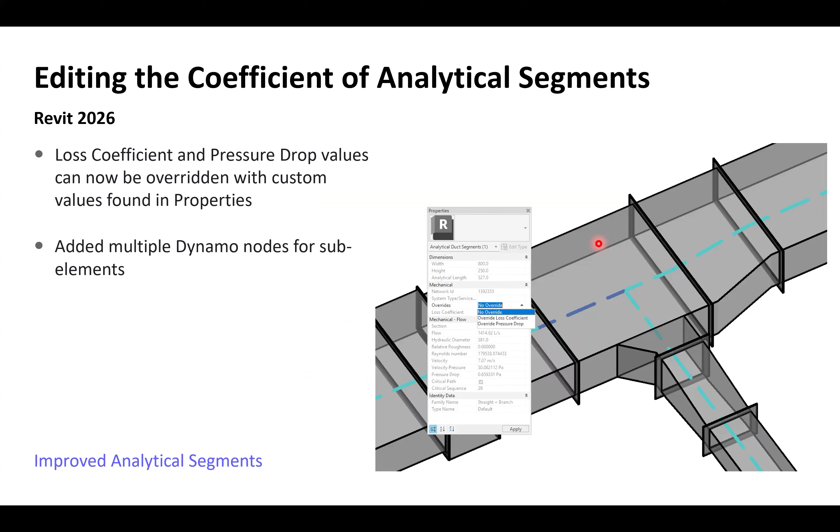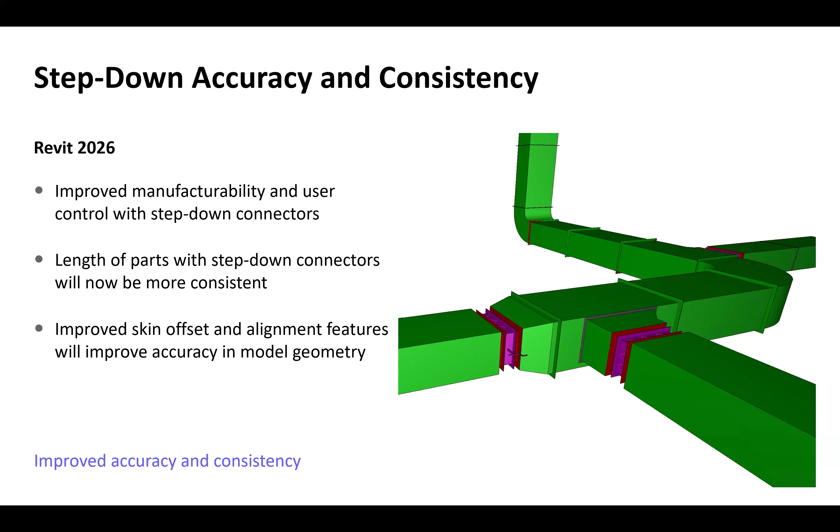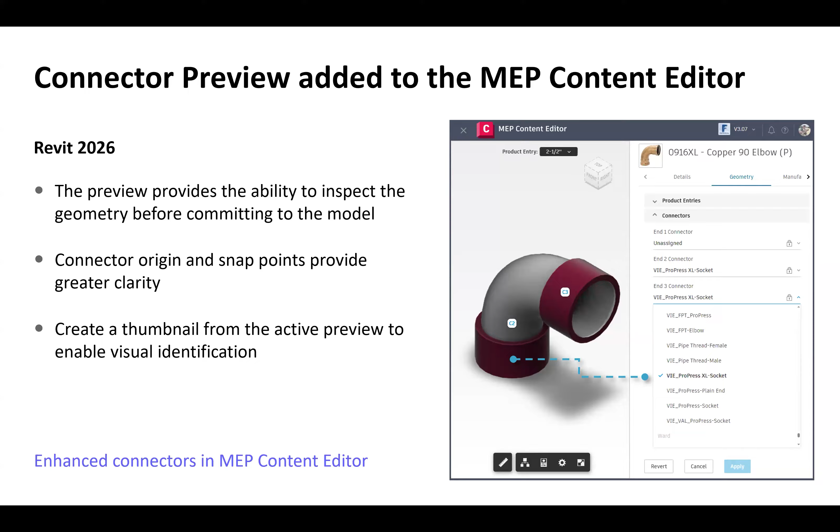So that's all about the updates with the 2026 feature. Go and check out all those new features.